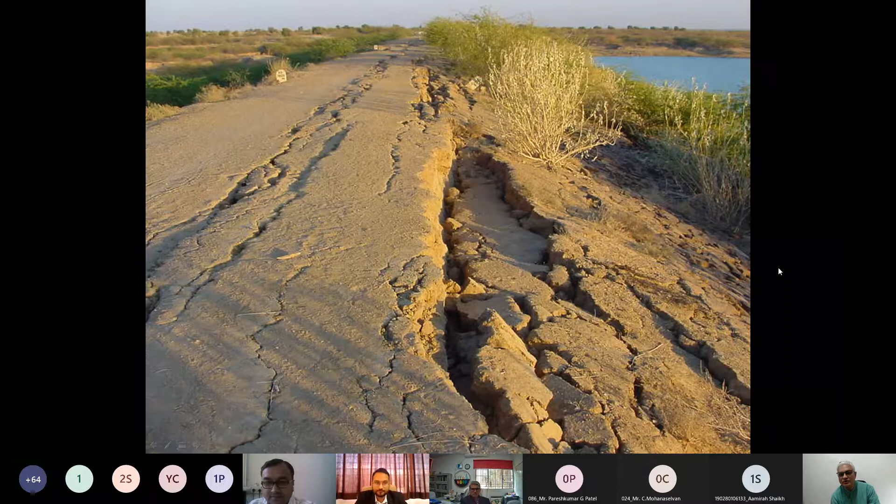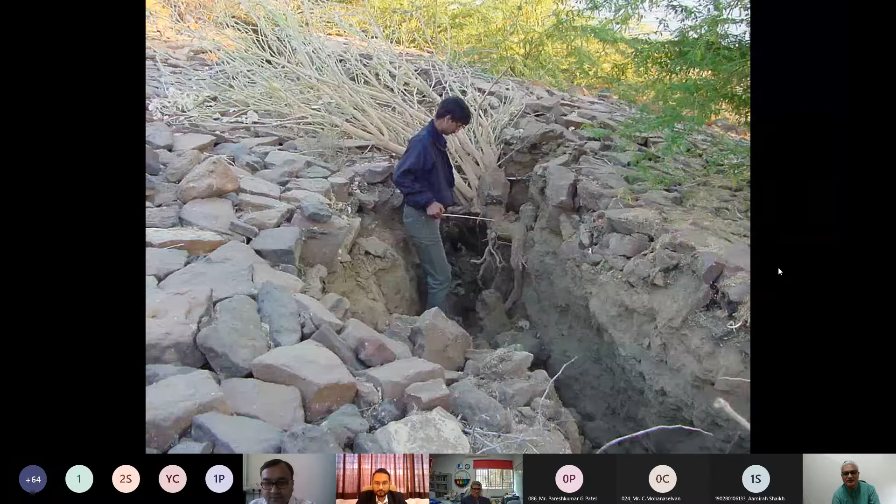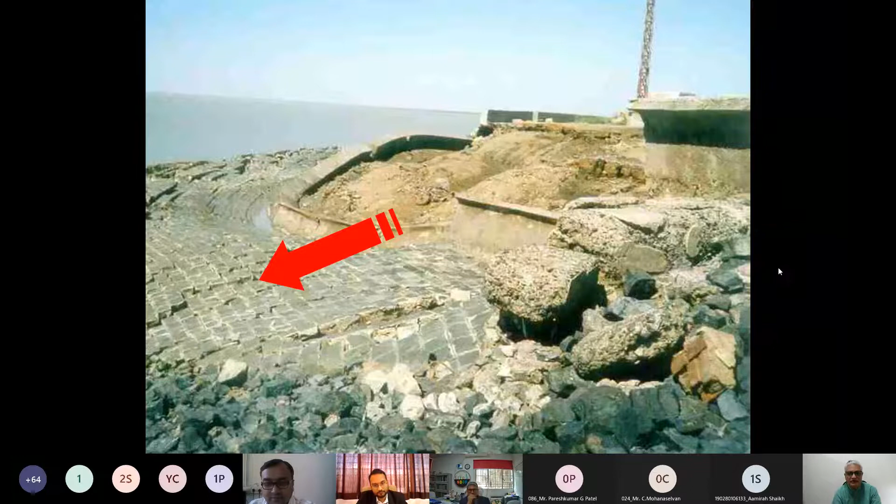On the context, I would like to show you the magnificent Himalayas, the broken Fatehgarh Dam, and the stepped slope failure which Jaswant Arlekar is daring to get into, seeing the cracks and sliding surfaces of the railway embankments, the quay walls giving way due to liquefaction, the fracture of the longitudinal highways, the tilting of the seaport in Kandla, and the collapse of the office building next to the seaport control tower.

Extensive liquefaction in the Kutch region caused the upliftment of a building by 7 centimeters, and the collapse of masonry houses in the Uri Tangdhar region of the India-Pakistan border.

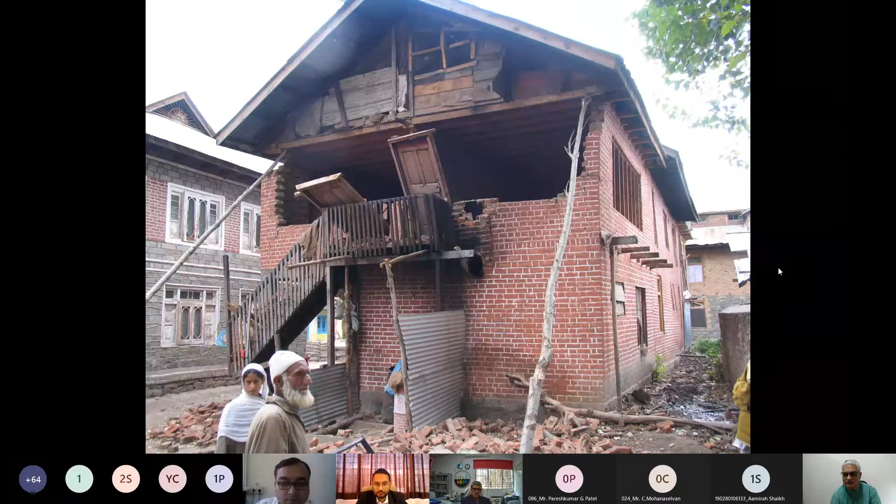We see precariously balanced masonry houses, a laterally dilating two-story masonry house, a new school building being built in Jammu Kashmir without any lintel bands, an existing school building with 60% openings carrying 400 school children, and the classical Dhajji Dewari construction which has stood for centuries, facing earthquakes very regularly.

We see the outstanding thermal comfort and physical safety of people in Dhajji Dewari constructions, and modern architecture blended with Dhajji Dewari construction in high-end buildings in Jammu Kashmir, with very intricate detailing and exquisite architecture.

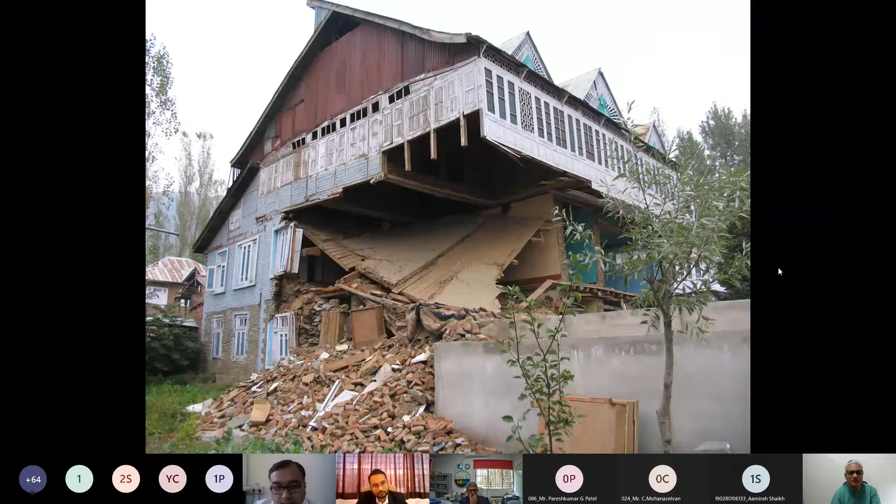This construction is prevalent in north India, with a hybrid of unreinforced masonry in the lower story and a sense of Dhajji Dewari in the upper story, or unreinforced masonry in the lower story and wooden houses in the upper story.

We see the collapse of the railway station building in Bhachau, the fracture of the rails, the collapse of the roof of the brick kiln in Kutch, the open ground story structure in the Indian Oil Corporation campus, and the collapse of numerous 5-story and multi-story buildings, including Takshashila here in Bhuj.

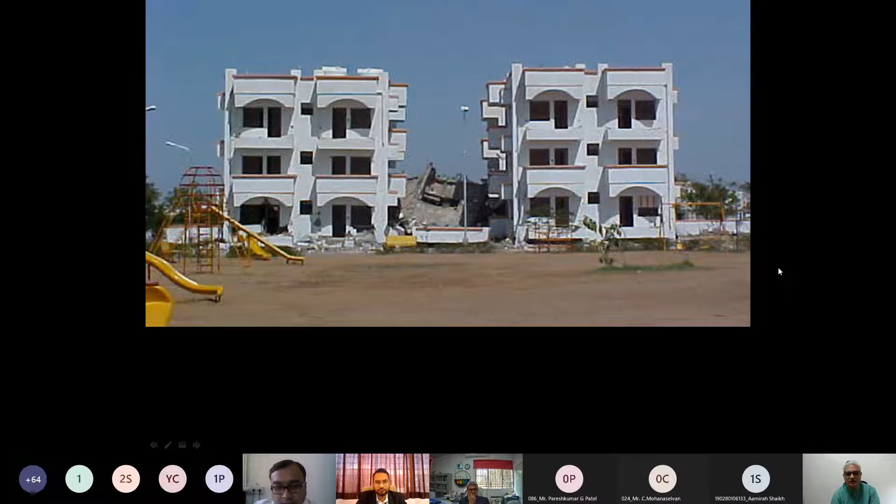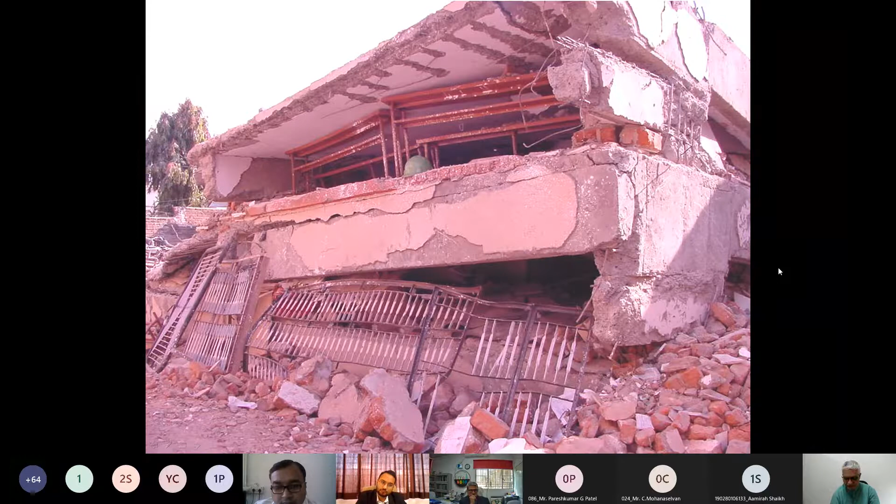We see the complete collapse of a 4-story building in the background and the collapse of the open ground story in the foreground of the Indian Oil Corporation building, collapse of 2 stories on the right hand side, collapse of 1 story on the left hand side, out-of-plane collapse of infill walls of the BSNL building, and the collapse of the school building in Kutch with pancaking of the floors.

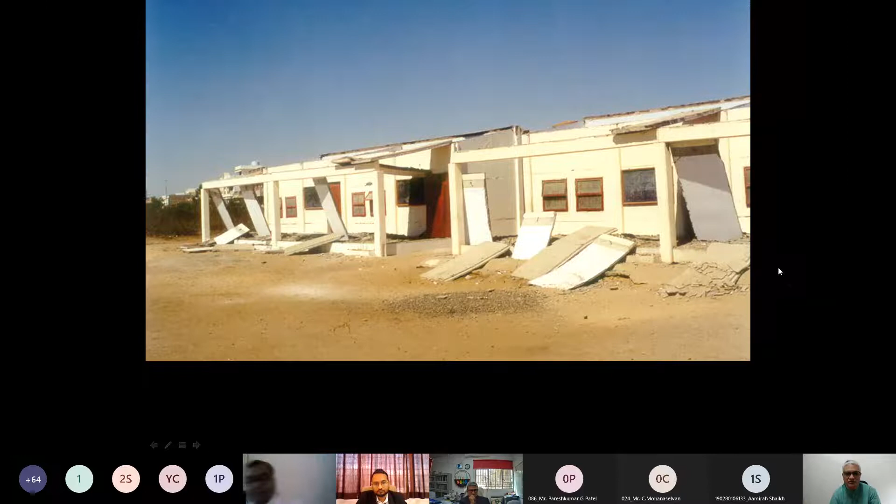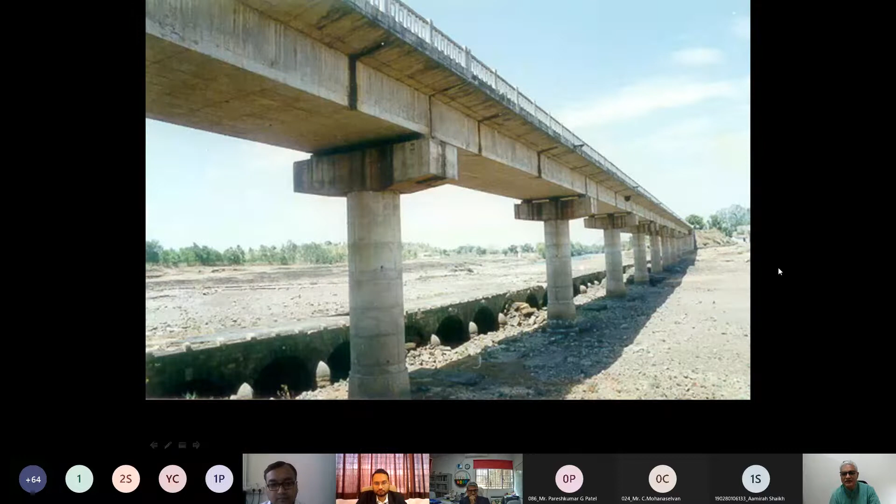There was collapse of 3,500 reinforced concrete school rooms in various parts of Gujarat, the collapse of precast roofing truss systems, and precariously balanced bridges in the Narmada region.

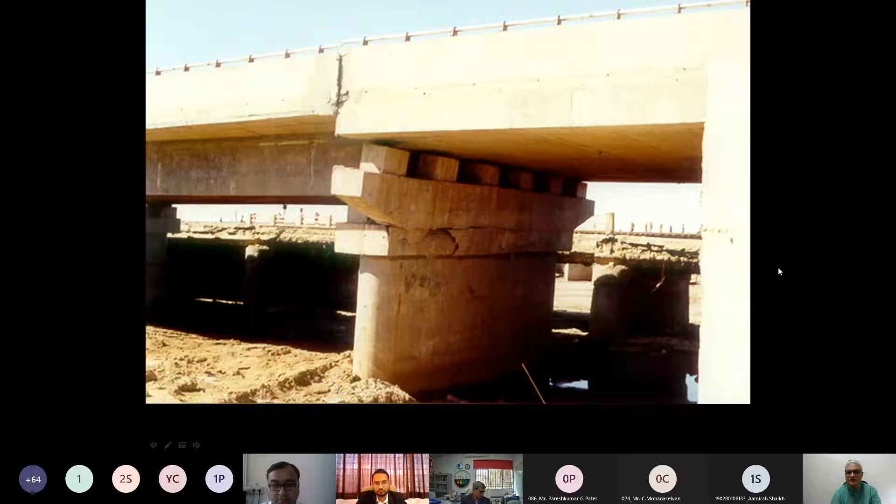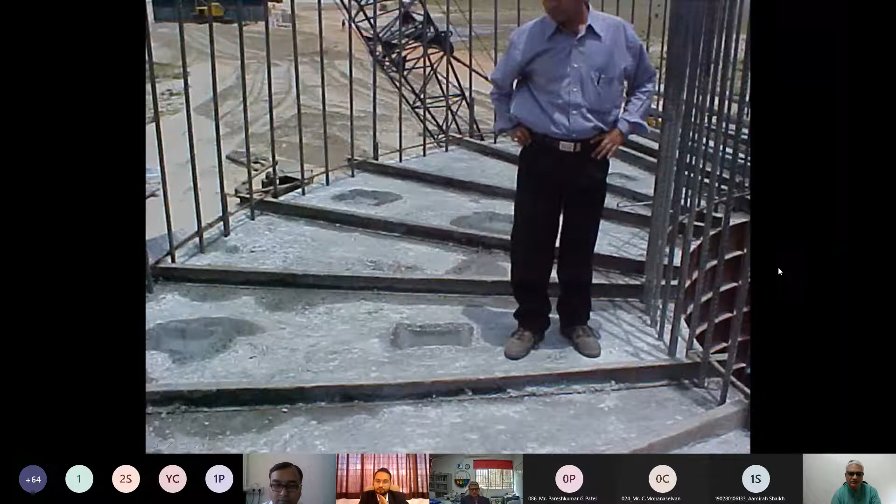We see damage to the short span at Vondh, damage to the arch bridges including masonry and railway arch bridges, and the construction of well foundations without any reinforcement in them.

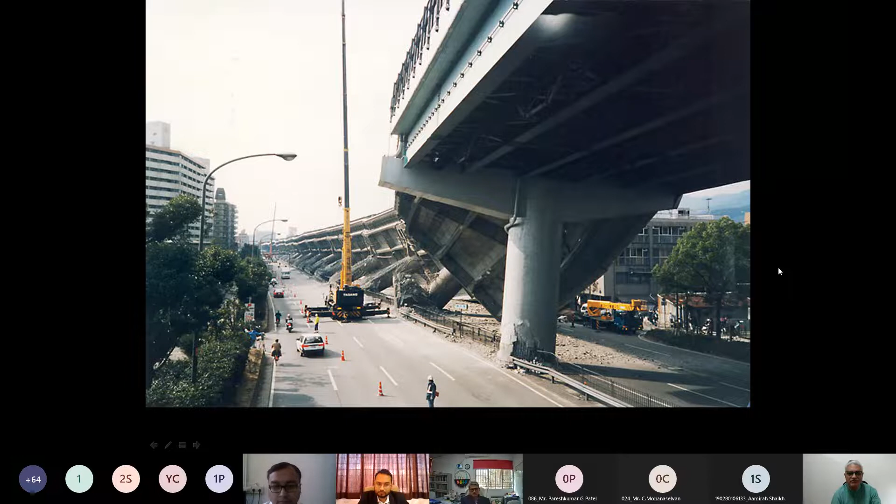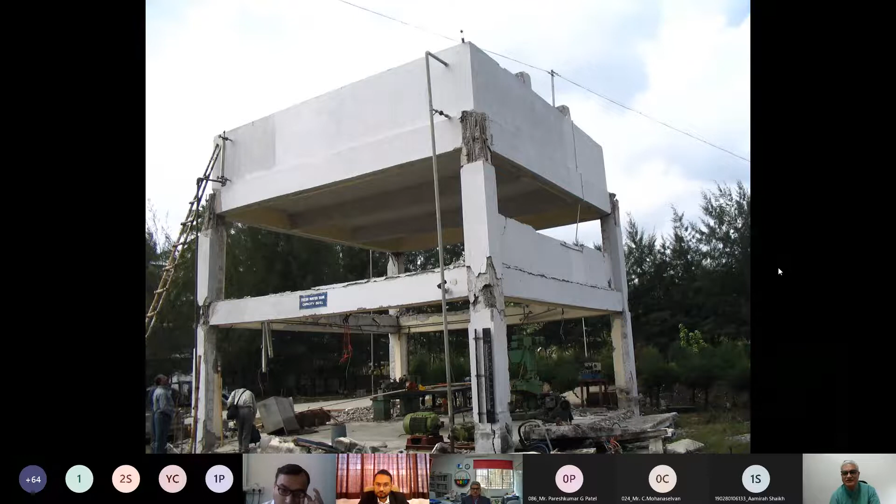We see the collapse of long freeways similar to those built in Japan but now being built in India with similar construction strategies, the fracture of roads, the collapse of jetties in Andaman Nicobar with complete loss of jetties, fracture of water pipelines, and severe damage to elevated water tanks at the beam-column junctions, including collapse of shaft staging and frame staging structures.

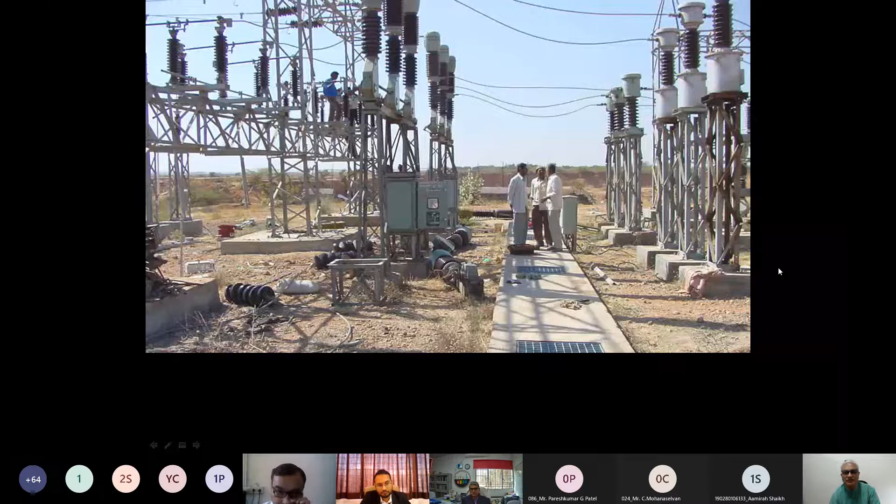We see the collapse of the electric control room in Anjar, the ceramic line breaker poles collapsing in the Anjar electrical yard, the passenger terminal in Port Blair, the passenger terminal in Car Nicobar Island, the collapse of the air traffic control structure in Car Nicobar Island, the collapse of the salt factory in Kutch region, and the mushrooming number of buildings touching each other all along the Himalayan belt with little or no space for any relief in the country.

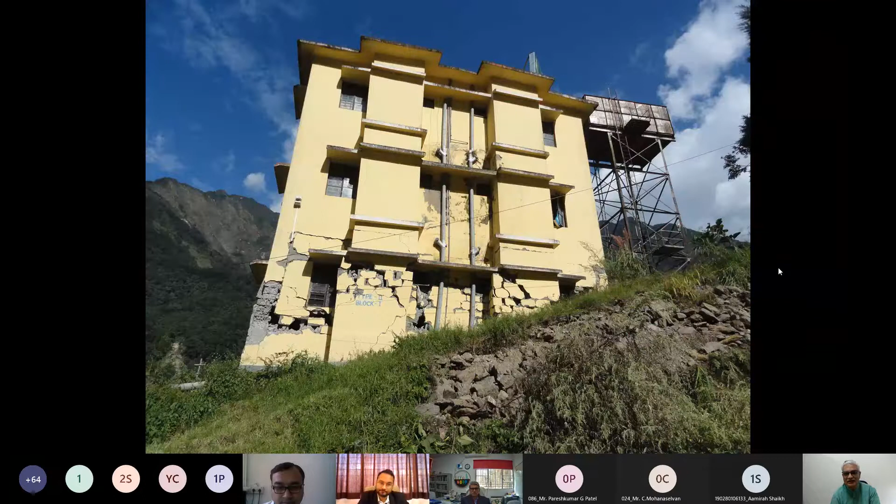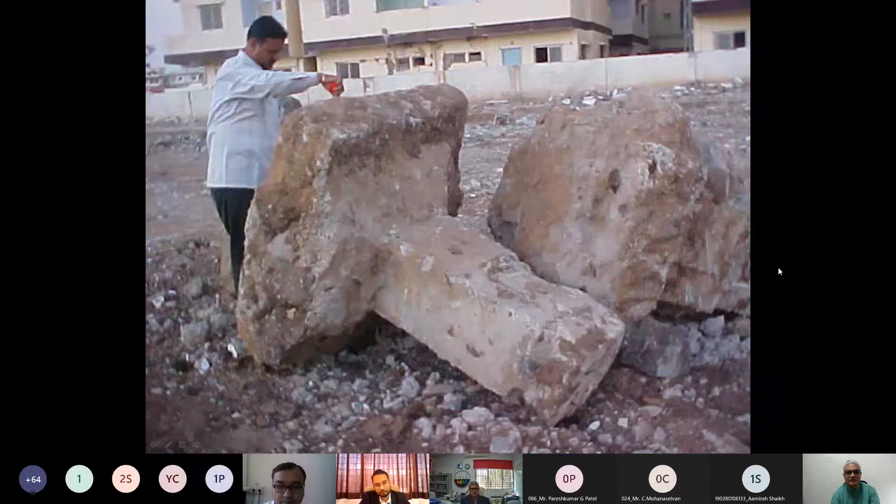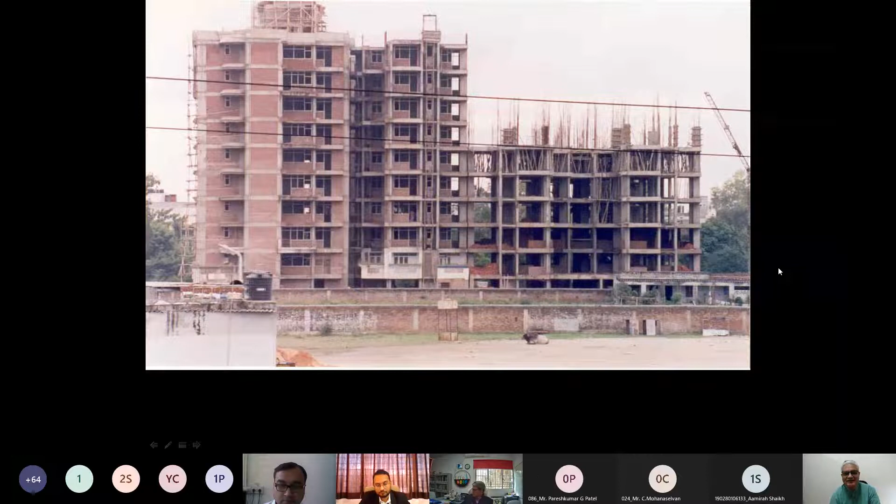In all this that we are looking at, there is no techno-legal regime across India, and hence from dust to dust, from ashes to ashes, from rubble to rubble is what our destinations seem to be here. Sloped constructions, pancaking of structures, lateral pounding of one structure on the other and that structure on the fourth one, identical foundations across the country, column sizes not changing irrespective of the height of the structure and remaining 9 inches forever in this country, and collapse of the single story scooter shed.

A contrasting behavior of two neighboring structures, one collapsing catastrophically and the other one standing right next to it. In all that you saw here, the question that I have for all of you is, where did we go wrong? I want to hear this from all of us. We are teachers, we have to do introspection. The question is, where did we go wrong?

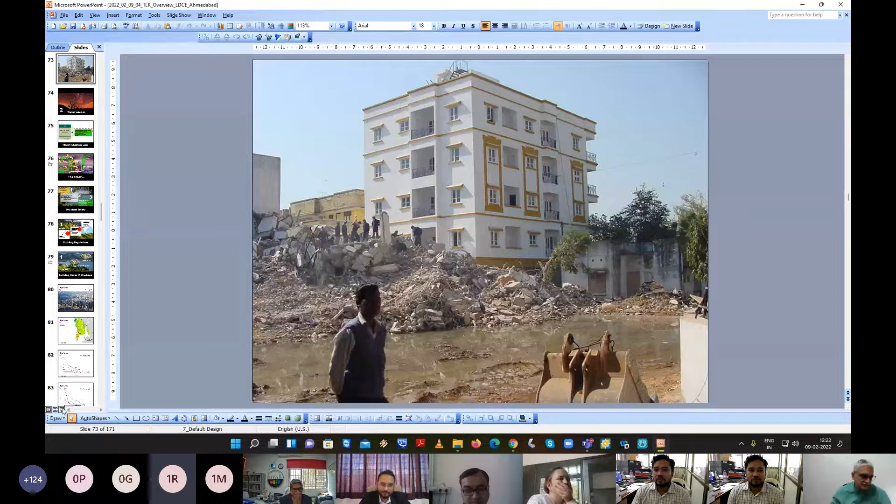So let me begin with the NDMA guidelines of 2007, which asked for all new construction to be earthquake resistant. We need to retrofit many of the existing structures, and we need to have regulation and enforcement. And of course, it has talked about capacity development also.

Before I begin, I'd like to mention that when you start doing something, you know what has to be done. Then are you trying to do that? If not, that is error of intention. If you are doing that, are you succeeding? If not, that is error of execution. If you are succeeding, that's successful completion of the task. But if you don't know what is being done, do you recognize that you don't know? Do you know that you don't know? That is error of concept.

And if you know what you don't know, are you trying to make up for that? If you're not, that is error of intention. And if you are doing something, are you succeeding? If you're not succeeding, you need to go back and check whether you know what you don't know. And if you're succeeding, you have to start asking, are you doing it? So in this entire exercise, three errors are there: error of concept, error of execution, and error of intention. Error of intention is the most dangerous of all of these.

Willful misconduct of professional services is culpable under the Indian Penal Code as homicide. This is the technical sentence that will be read out against you if you are part of that crime. This can be contained only through a national law like the Earthquake Risk Reduction Act or the Structural Safety Act.

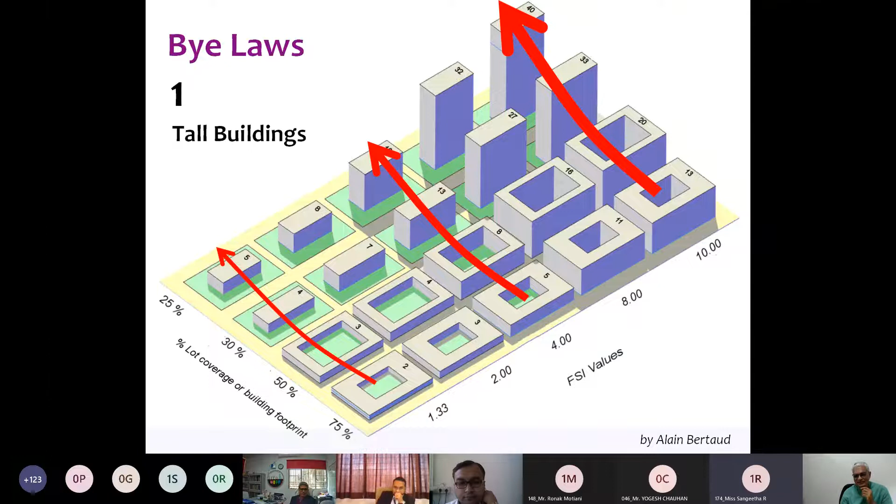If you pack a large number of buildings very close to each other and don't want these buildings to touch each other, that is why you're actually insisting on taller buildings. This is the worry we have - tall buildings are of the rich, for the rich, by the rich. They are not affordable by the poor, especially since maintenance costs are prohibitive. And as I said, fire safety is something we'll have to worry about if we go too tall and our fire tenders can't reach there on time.

Early versions of bylaws had excellent provisions actually, but 7 to 8 revisions in the last few decades have degraded all these bylaws, and they're all mimicking each other. Middlemen and interest groups are playing havoc by getting their interests served - knowledge is power and ignorance is bliss. This is what we are trying to understand. Middlemen are keeping knowledge away from the common man and plundering on ignorance. Stability versus safety.

Interestingly, all municipalities give you a stability certificate. In fact, no structural engineer designs a structure if it is unstable. So they should call it a safety certificate and not a stability certificate.

Stability means that under design loads itself it will not topple, and toppling is not the game they're supposed to check. They're supposed to go beyond and look for safety, how these structures will resist these loads, and what kind of damage they will incur, and whether the damage is repairable or not is what we have to ensure. So a special human effort is required now to correct all these errors.

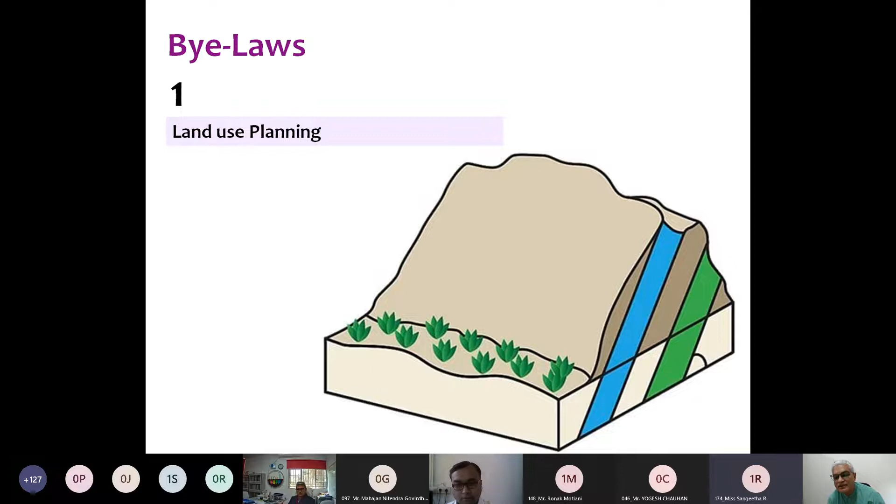For example, in bylaws, there's one issue of land use planning. If you can see this hill slope, can you build on this slope facing you, or can you build on the back side of that other slope? That is the key question. On this slope the soil will always keep sliding, but on the other side, the layered soil is perpendicular to the direction of the load, so we are less likely to have a slide if you're on the inner layers, because the top layers are still there before they slide out. So this is how we have to watch out on global to local planning issues.

Geology also has to be considered, liquefaction has to be considered, and only then should construction be permitted in different regions. Of course, we have not been following that in this country. We have been indiscriminately carpeting all the hill slopes with a large number of constructions, and very rarely will you see buildings being built in modest size with good distance between them. We are not talking about boutique or embedded structures, those are all done under special conditions.

The model building bylaws in 2020 by the Town and Country Planning Organization of the Ministry of Urban Affairs have come up with a reasonably comprehensive document now, which every state can adopt with some modifications to customize it to their state's needs. This is an urgent step required to be done by the states. And as we talked about enforcement at the national level, so that was the first item, about regulation.

Second is enforcement. At the national level, the Disaster Management Act asks us to make sure that all constructions are disaster resilient. But that is not being followed, and so we need to come up with a more explicit act called the Earthquake Risk Reduction Act now. That is needed.

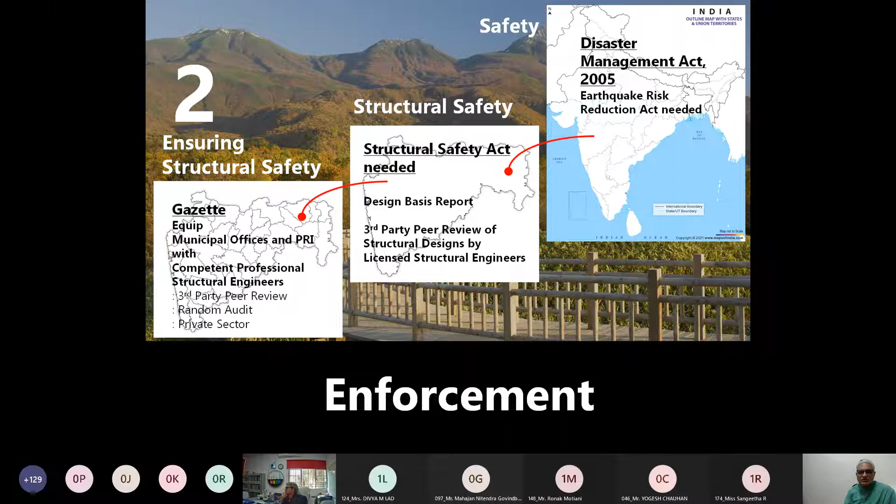And at the municipal level, we need to equip the municipal offices and the public Panchayati Raj institutions with competent professionals and structural engineers so that they can do this peer review and random audit, and they're all from the private sector. So the private sector has to come in a big way to improve enforcement in this country. It is not something the government alone can do. Government can facilitate, but private sector has to come in a big way to do this. Third-party peer review is what we are looking at.

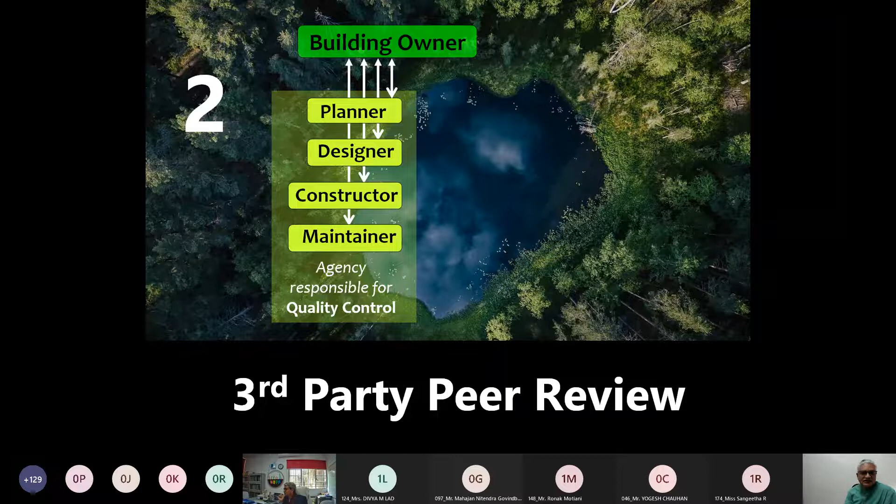So for those new to third-party peer review: building requires planning, designing, constructing, and maintaining, and that has to be done by those who went to good colleges, learned the subject properly, and passed with good marks. Those are the competent hands we call quality control people. But even though they are the best in the country, we still need experienced people to oversee their work so that any mistakes can be corrected urgently, and that is called the quality assurance group. Now this quality assurance group reports independently to the building owner, and this third group is called the third-party group, which is supposed to do the peer review, right?

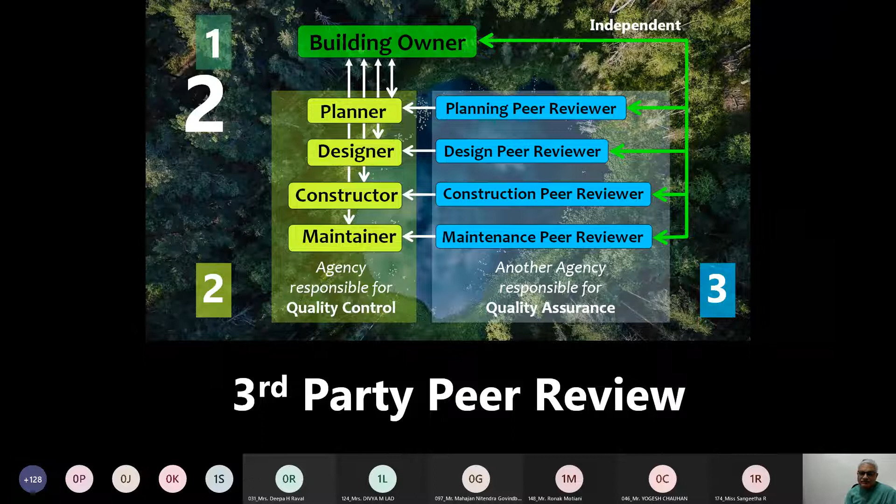Now, just to make sure of this peer review, as of now we are doing very little of it actually, very little, and that too only by IITs and NITs approving the design. This is not how a country can run. So we need to come out of that and get into 100% audit in the next 10 years, which means we need a large number of engineers and architects who are competent in this subject, so that they can ensure safety of the built environment in India.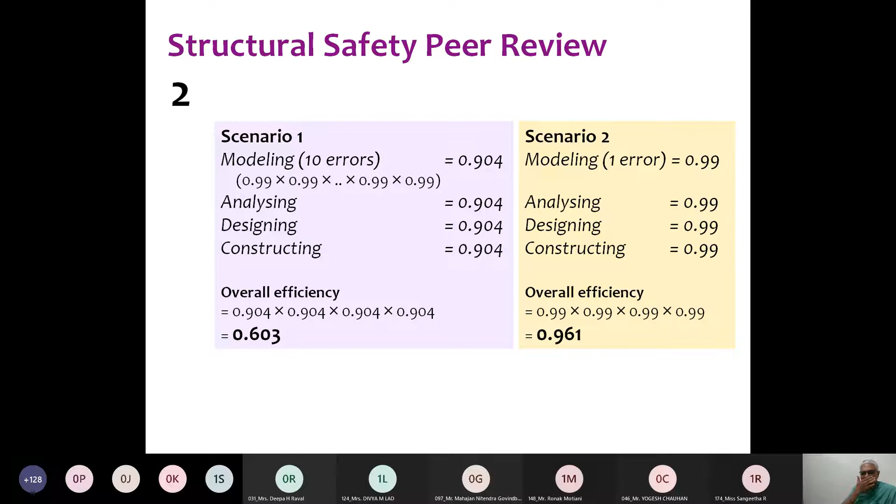And look at the left side and look at the right side, 60% versus 96%. This is the importance of peer review. If I can reduce the mistakes right at the beginning, then they will not cascade into something very big by the end. And that is what the third-party peer review is all about.

Now, if you don't have peer review, the service life of the structure will reduce. If you have good peer review, then your service life can be enhanced significantly.

Now, peer review alone will not suffice. Even quality control group has to come into picture. If you employ poor graduates, meaning graduates with poor knowledge of the subject, then you will not be able to get a good structure. And that is why it is important for us to employ competent people to do both quality control and quality assurance. Quality assurance group is competence plus experience, both of them. And quality control is you need not have experience, but you need to have competence.

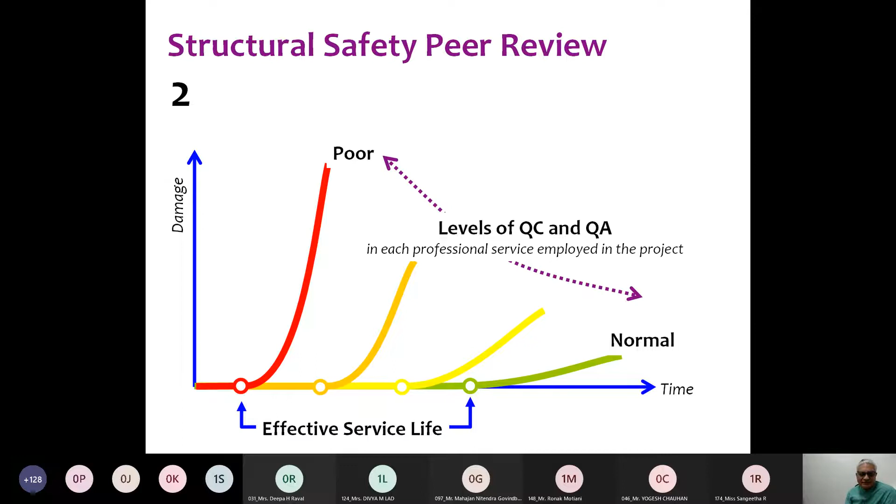Third part is capacity development. And so first item in that is technical education. So at bachelor's, master's, postgraduate diploma and doctoral level, we have to introduce earthquake resistant design as part of the mandatory curriculum. That is what many of you said that also.

The second one is for those who graduated, we need to bring continuing education into picture. And the third one is that every 3 years, the teachers and professional civil engineers need to write an examination and be licensed to be able to do design if you really want to practice design.

Now you might say, I'm a teacher, I don't want to practice construction or I don't want to do any design. Why should I write this exam? The important thing is that today teachers are not learning after graduating. And so this will be one way of forcing ourselves to really become up to date in the subject, because we have to teach, we have to know more than what we have to teach in the class.

If we know 100, we can teach 10 nicely in the class. So this is the least that the teachers of India can do, is to write the licensing of engineers examination.

Then the last item is certification of artisans, where vernacular constructions are understood and their methods of construction are taught to masons, bar benders, welders, carpenters, and so on.

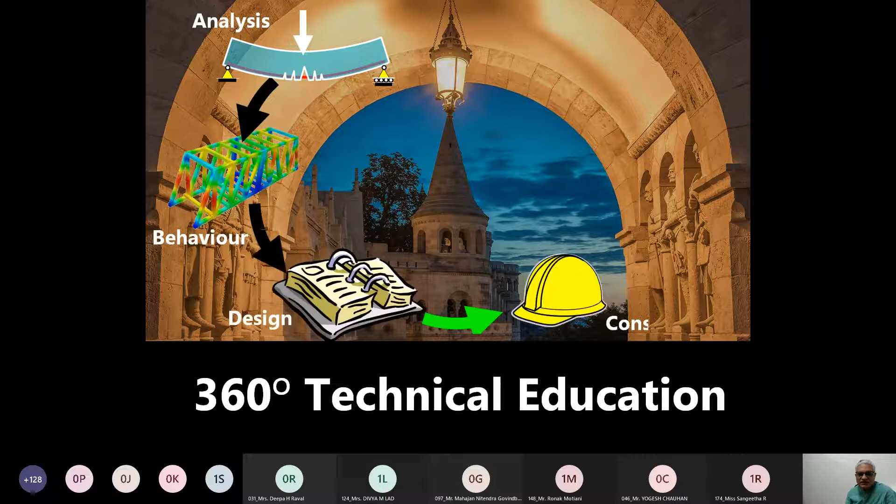So in effect, when you look at technical education, it has to be holistic to have analysis, behavior, design, construction, maintenance, and retrofit. All of it has to be taught. So if an engineer has to be a complete engineer, one has to go through all of this in one's lifetime.

Now you might say, how about teachers? You need to have control in the first 3, analysis, behavior, and design, and you need to have exposure to construction, maintenance, and retrofit. In fact, I would think that in the times to come, where retrofit is going to be the major professional activity, teachers will also need to learn, in addition to analysis, behavior, and design, retrofit also, and do experiments on that and show to the practicing engineers that their retrofit schemes are efficient or otherwise.

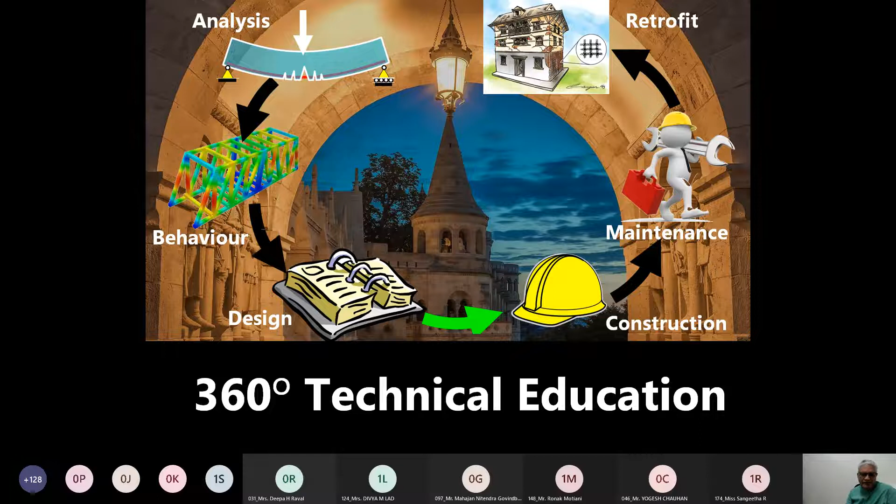Licensed engineers are the ones that will be able to travel across the world and do designs in other countries also. Or if Dhirubhai Ambani says, I want to design my plant for the standards of America, then you need Indians to know international standards.

So it will really help if you are able to get a licensed engineer, because the person will learn quickly the design standards of other countries and implement that in this country.

Licensing of engineers is a two-step process for us. We want to start with a small location, one town, one state, which is very small, let's say a Union Territory, and then we can grow it to the rest of the states. Or we can start in one small pocket of Gujarat, west side, and then later we'll implement on all the east side. We can do it that way if we don't have enough hands.

They will write a fundamentals of engineering examination and then get an engineer in training certificate. Then they go through work experience. After a certain number of years of formal work experience, they will write the principles and practice of engineering examination, the PE examination, and become an accredited professional engineer. Then they will be permitted to approve designs.

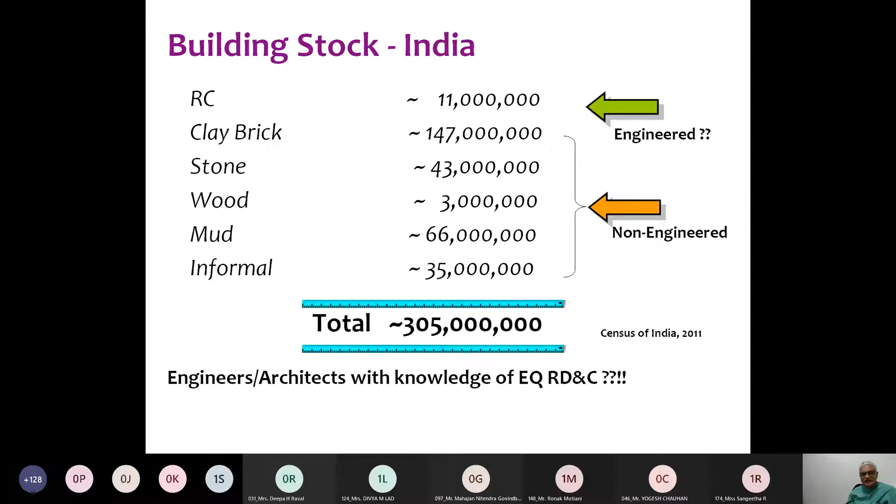So what is the challenge for us? The challenge is the scale. We have right now about 30 crore houses in this country, of which 97% are non-engineered and 3% are so-called engineered. And you saw the pictures of all the engineered structures also. So in effect, we need to start fresh. And 80% of this built environment is sitting in seismic zones 3, 4, and 5, which means about 25 crore constructions have to be retrofit.

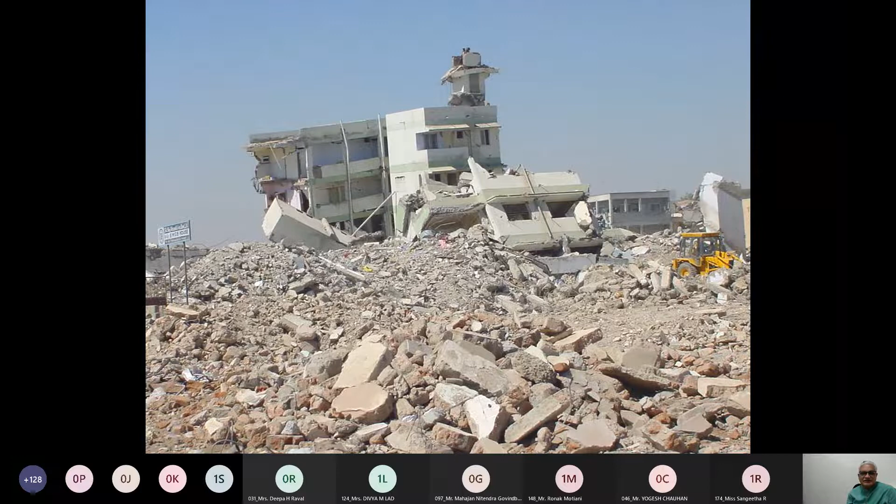Now, if this is how we are going to construct in future, then only hard work will not suffice. Some amount of regulation is also required to avoid scenarios like this. In time ahead, we pray that much of the construction will also use innovative but simple construction strategies like confined masonry.

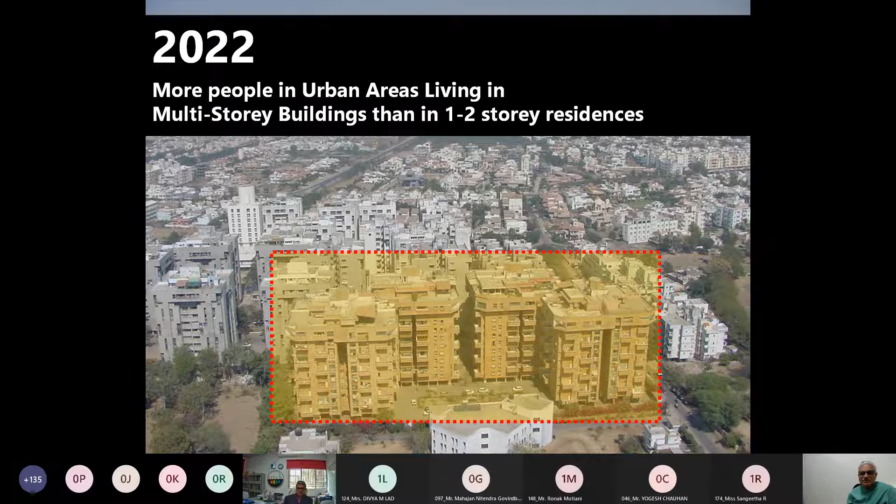What is interesting is in 2022, more people in urban areas are living in multi-story buildings than in 1 to 2 story residential bungalows. Today the number is about 60% to 70%, depending on which city you are in. And that is an amazing fact, because that is going to change the way education will have to happen in colleges now.

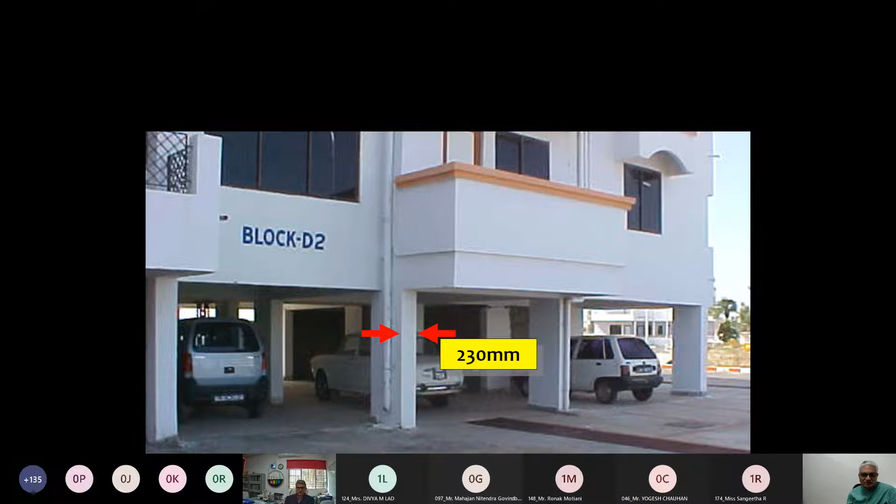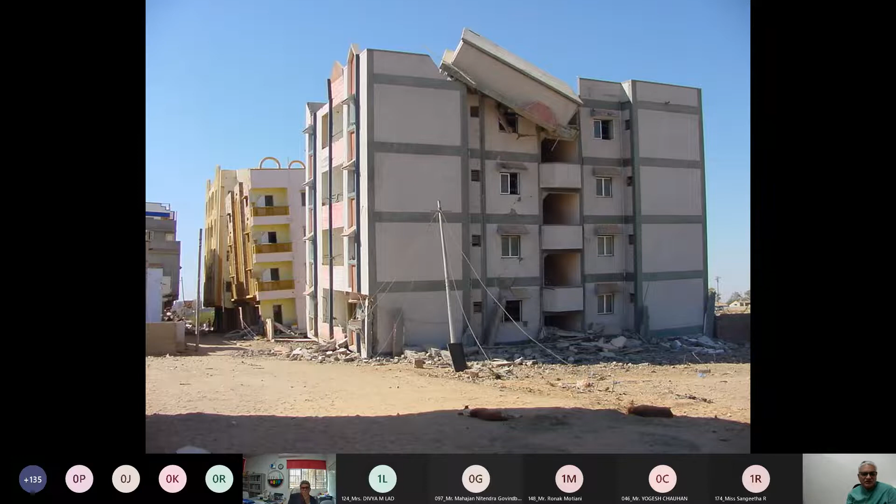Look at these big heavy boxes sitting on slender toothpicks. This luxury we cannot afford to do anymore. We cannot build 9-inch columns in seismic zones 5 and 4. We cannot have collapses like this anymore in the country in any of the seismic areas. We cannot have the horrifying pictures of a street full of collapses like this. Brittle collapses with 90-degree hooks should be avoided.

So one of the things bylaws have to do is outlaw unreinforced masonry and untested technologies like large panel precast construction or pre-engineered buildings. They don't have standards today, and they are being constructed. This is where the danger is, that the construction industry is running fast without any municipal regulations. Anything that they do is being approved on paper by a few people, and that is getting constructed, which is unfortunate.

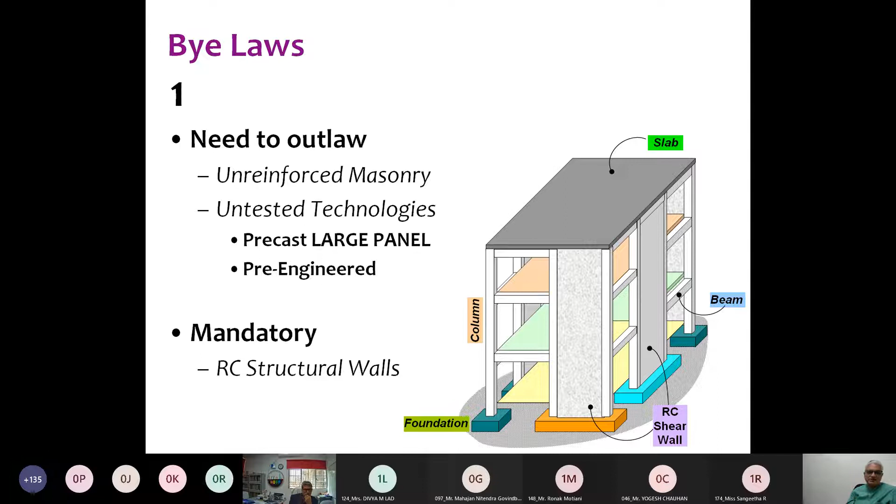And if you have to save people in high seismic regions, every building should have structural walls going from foundation to the roof. No choice on that.

So what is a techno-legal regime? The etymology says it's a technical activity, legally supported. It's a legal support for the government, and there is a system for it - a way of regulating construction in the state to become safe against design loads, including earthquake loads. Why is it needed? Because construction is a state subject, and safety of the people of the state is the responsibility of the state, city, and the people of the state.

Virtues cannot be regulated. If you tell people to do good things, they won't. People don't do everything right by themselves. Holding degrees does not guarantee graduates know how to do technical work properly.

In fact, Article 21 of the Constitution of India says protection of life and personal liberty: no person shall be deprived of his life or personal liberty except according to procedures established by law. This fundamental right has been provided against the state only, but where an act of a private individual supported by the state infringes on the personal liberty or life of another person, the act will certainly come under its ambit. So protecting life is fundamental for every state. The state includes government departments, legislature, administration, local authorities exercising statutory powers, and not non-statutory private bodies having no statutory powers, for example companies and autonomous bodies. So it's all the more the responsibility of the state to have a system in place.

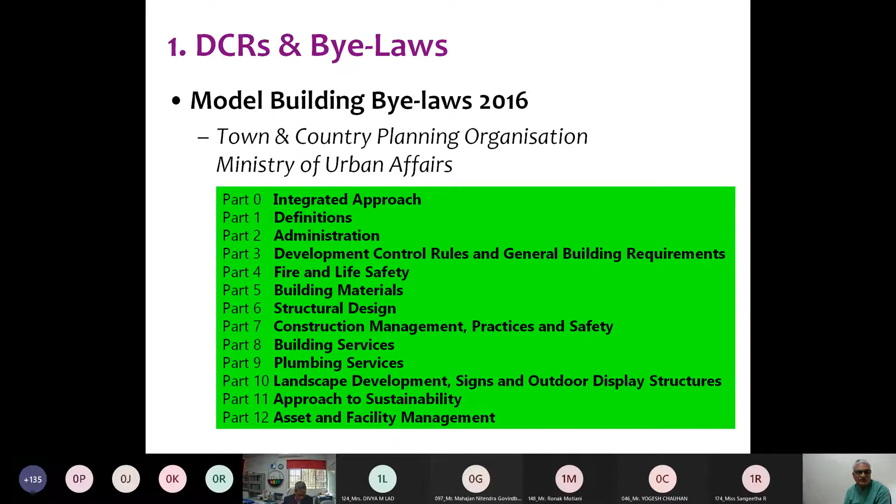The licensing of engineers, mere education is insufficient. That's what it says, and we have to come up with a process to judge everyone on a common platform, because so many colleges, 4,000 engineering colleges, teach the subject differently with different commitments of teachers. It is not possible to expect all graduates will come out with the same level of content.

And so the requirement for each state is to build a safe environment, and legal backing is required for us, to regulate the eligibility of engineers, especially structural designers. And we need to have engineers for design of new structures and engineers for retrofit of existing structures.

This is a separate track altogether, and government should spend on training the government engineers at least, if not all the engineers in the state, on the subject of design of new structures and retrofit of existing structures.

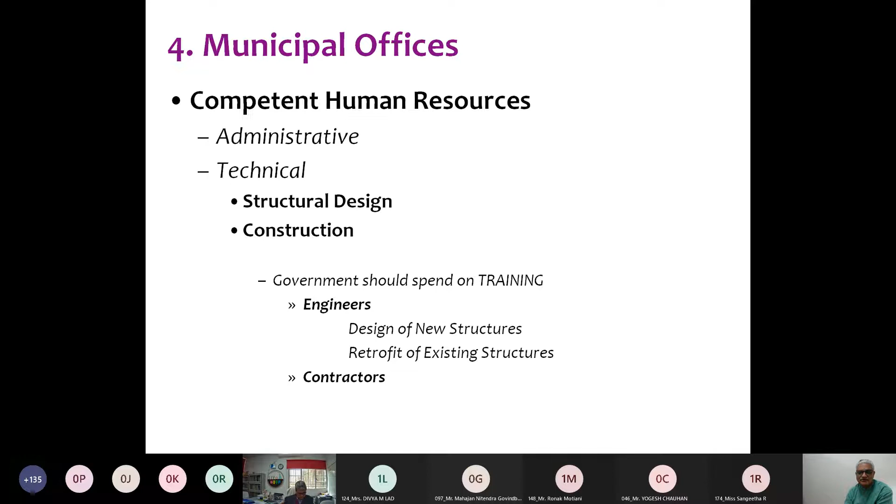I'll stop here by saying that we have not been doing things right in the past, but that is because quality was not in our focus. But if you raise the quality, you'll be able to serve more number of people in the country, even though it may be a bit slower, but you'll be able to provide for more people with this higher standard of quality.

We need an integrated approach to use all three sets of documents together, and the techno-legal regime will indeed make a big difference for the safety of the people of India in the next earthquake that will happen in the country. So we need an engineering profession that is regulated by law, both at the national and state levels.

And engineers should be getting full dignity as professionals, and of course should be made accountable for their acts. Accountability doesn't mean always that you'll be put behind bars. Accountability means that you do whatever you do to the best of your ability and to the expected level of benchmark. If it is not up to the benchmark, don't approve the design.

So it's a joint responsibility of both the individual as well as the system to make sure that the individual grows and provides services to the acceptable level.

It's a tough situation in India. We have slept for 75 years and now we want to do something nice. It is going to be a tough ask for us. And when you look at the seismic hazard in the country, and with so much of techno-legal regime missing everywhere in the country, it can be a little overwhelming.

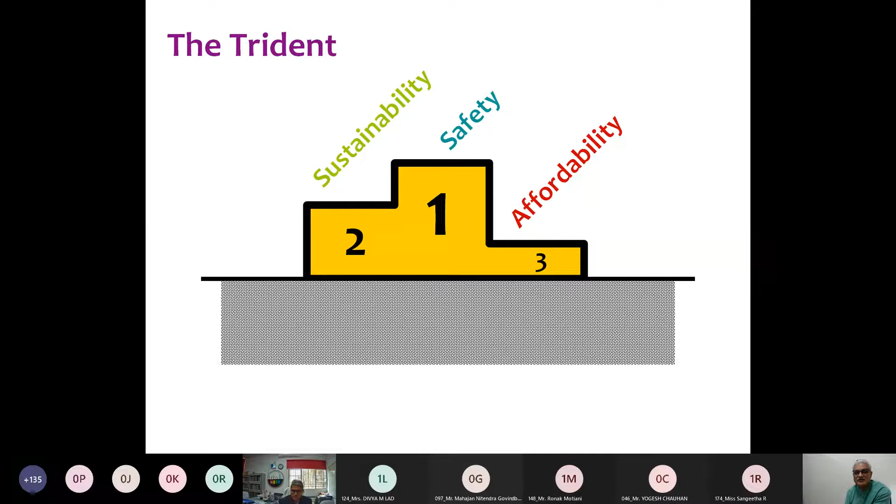Only education can pull us out. What has to be done is known already. We just have to implement that. Somehow there's a lot of inertia, but we hope to break this jinx soon and keep safety on the front seat in time ahead. We need to take tough decisions because we have not been forceful in the last 75 years on the matter of safety, and we have to break a lot of myths in this process.

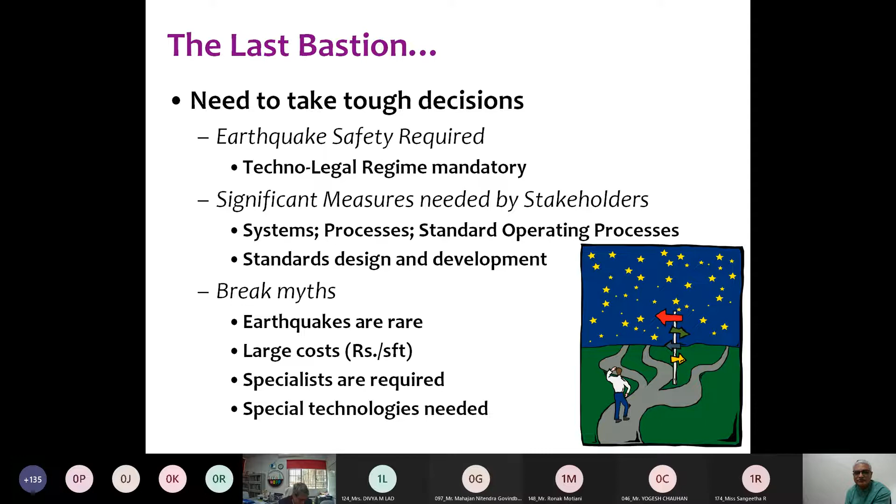If we don't, then we will see more pictures that were shown in the yesteryears from various countries on the matter of safety. This is one picture that tells us that, to change this nation, we don't have to do big things. We have to do small things. And we have to do things that are within our hands. And that is all that we are seeking in this entire effort.

I pray that each one of us will do our bit and hope that collectively the efficiencies will grow and the nation will move forward and we won't kill any more people in the time ahead. It's all in our hands now, and I'll stop here by thanking Colonel Sangvi again and thanking each one of you. Jai Hind.

I can take some questions. Yes, sir. Sir, thank you very much, sir. It was a really wonderful and interesting and informative session for all of us.

Every time you say the same thing. Amira, you're saying the same thing last time also. No, sir, last time I'm not. Sir, last time I did not say interesting. It was really interesting because of your PPT, sir. It was really wonderful. Okay.